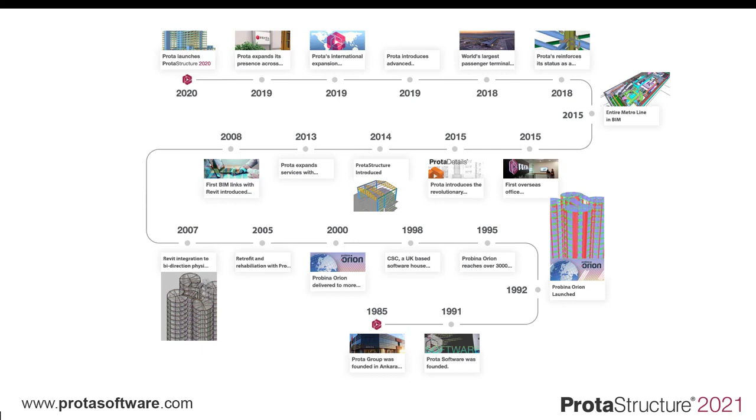Every now and again, a revolutionary software comes along that changes the engineering design industry, completely transforming the way structural engineers work. Now at Prota, we have been fortunate over the years to have been involved in some of these technologies which have shaped the way structural engineering is delivered.

In 1992, we introduced Orion, the first system in the world for integrated concrete building design and detailing. In 2005, this was the first software solution to provide detailed assessment procedures for building rehabilitation after major earthquakes, allowing the review of tens of thousands of buildings around the world to quickly provide safety and post-earthquake relief.

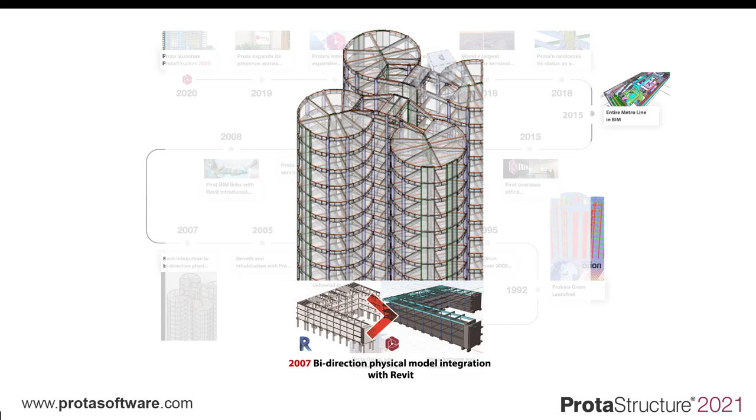In 2007, we were one of the first solutions to provide physical, bidirectional structural BIM integration with Revit, allowing engineers to communicate their projects and coordinate them with Revit. In 2014, we introduced one of the first dedicated physical multi-material modeling and design systems for building structures, ProtaStructure.

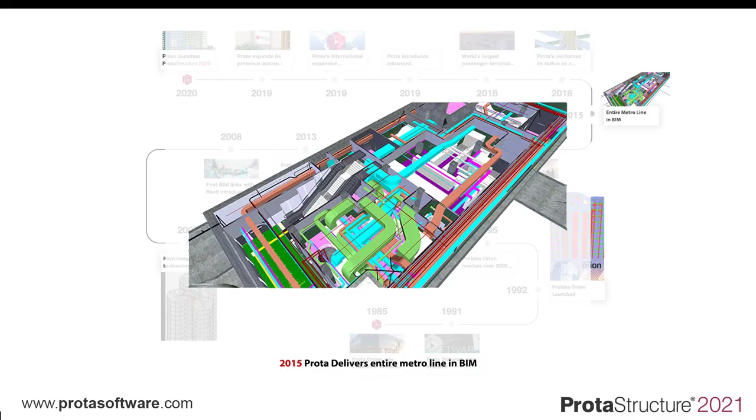Our engineering teams in 2015 were one of the first consultants globally to deliver an entire metro line fully in BIM, from alignments to structure and architecture to operational systems and construction project management, all using integrated BIM technology. And we followed this up in 2018 when we delivered the world's largest airport terminal building in record time using BIM design technologies.

Innovation is part of our DNA at Prota, and we have a passion for creating elegant and practical structural engineering design solutions that make your world a better place.

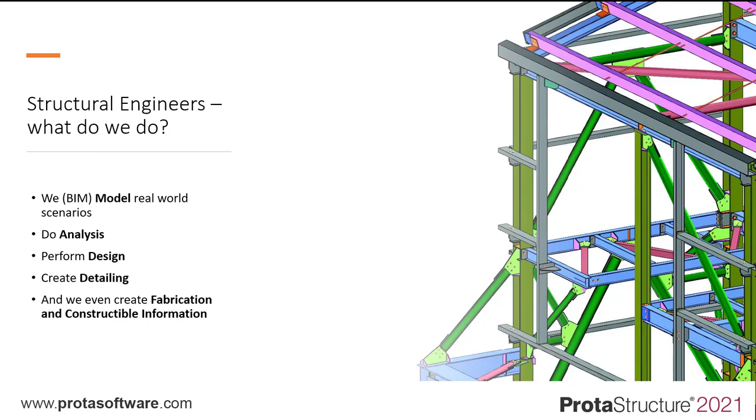As structural engineers, we wear multiple hats. We model the world around us. We do analysis. We perform design. We create detailing. And we even create fabrication and constructible information. We also coordinate and share project information through BIM.

Modeling, analysis, design, detailing, fabrication and BIM. It's a lot to cover.

Traditionally, engineers have used many programs to cover this. For analysis, you have systems like STAAD, SAP, Midas, S-Frame, Robot, ETABS, SpaceGass, and so on. There's literally thousands of them out there. Many of these do some design, but mainly member element design. Some even have component design, maybe using Prokon, Tedds, LIMCon and so on.

But what if you want to do a complete detailed design? Design a core wall, a continuous concrete beam, a steel connection, some foundations, with all the detailed checks for anchorage, lap lengths, ductility requirements and so on. All the design and associated detailing requirements, all in one.

Very few do any detailing. Normally it's manually driven with AutoCAD, BricsCAD, G-StarCAD. I'm sure you'd agree there's so many generic CAD platforms out there. But do they provide tools focused on structural detailing? Do they know what a rebar is or a beam is, other than just lines?

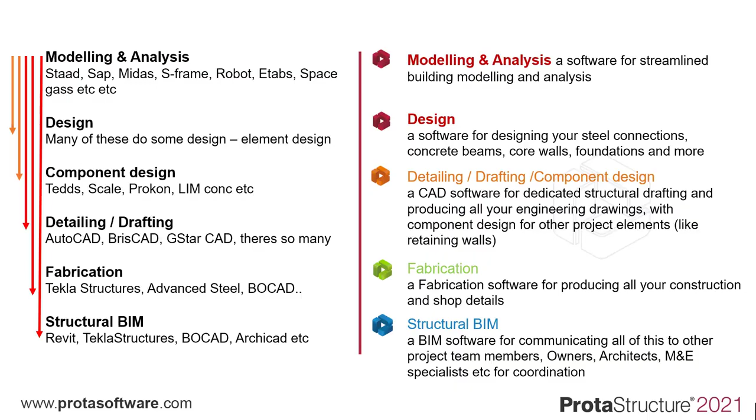A fabrication software for producing all your construction and shop details. And a BIM software for communicating all of this to other project team members, owners, architects, M&E specialists, and so on for coordination. A software for modeling and analysis, for design, for detailing, for fabrication, and for BIM. Modeling, analysis, design, detailing, fabrication, and BIM.

What if all this software was one software? We are very, very proud to introduce the future with ProtaStructure 2021.

Today I'll be taking you on a journey through ProtaStructure 2021, and we're going to share with you many of the fantastic enhancements which make ProtaStructure the leading structural BIM design platform for buildings. I'm very excited. This has been a combination of effort from a fantastic team of professional engineers and software developers around the world to realise this vision.

And to share this with you today, I'll be joined by a number of our key innovators that have made this all possible. So during the course of today's presentation, we're going to hear from Alto Gula, ProtaStructure's Development Manager, Mustafa Tumatan, ProtaStructure's Product Manager, and we'll also hear from Joseph Kubin, who's the CEO of the Prota Group and founded Prota Software many, many years ago.

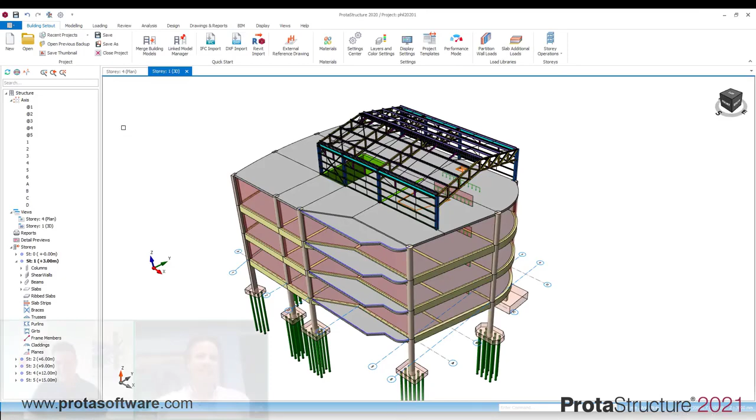Alto, I'd like to start with you. The new interface is so cool, right?

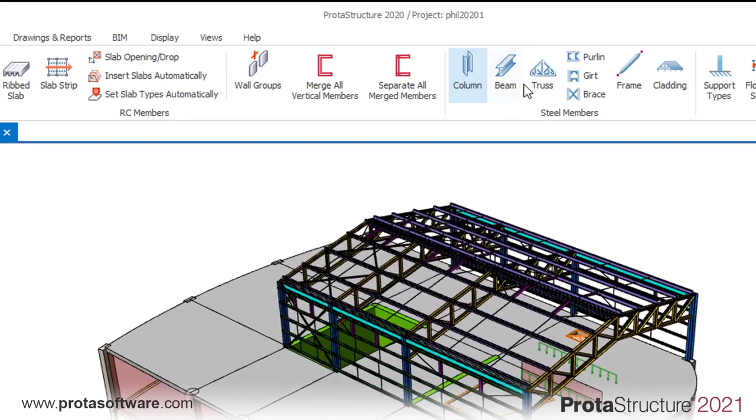Yes, it's so exciting. With ProtaStructure 2021, we looked at how engineers work and revisioned the entire interface. Here you can see the new ribbon. We've designed new icons to clearly show different functions like working with beams, columns, trusses, and the like. We've also logically laid out how, as an engineer, you'd work through a project, from creating a model to applying your loading, to performing analysis, and then running your design, right through to documentation and BIM collaboration. Everything is where it should be.

Yes, it really looks impressive. I love the new interface. It's very clear and easy to navigate. There's more to this though, isn't there?

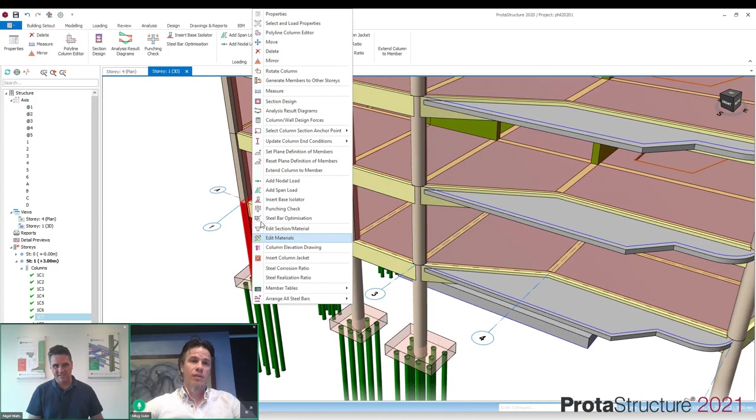We've kept the essence of ProtaStructure, so it's a very seamless transition for existing users. This is very important to us. The things that make ProtaStructure so great to use are still there. Users will see a lot of familiarity within the interface. Things like right-click functionality and many of the user menus have been kept, because over the years we've found that these are a very efficient and practical way to work. Users will also find that they can start using the new release right out of the box. They don't need to learn a new way of working.

Yes, I agree. When I started using it, I found it so easy to pick up and to work with. But there's just so much more, isn't there? Yes, there is. There are so many innovations to share with everyone. Yes, I can see you smiling there. Yeah, let's show them.

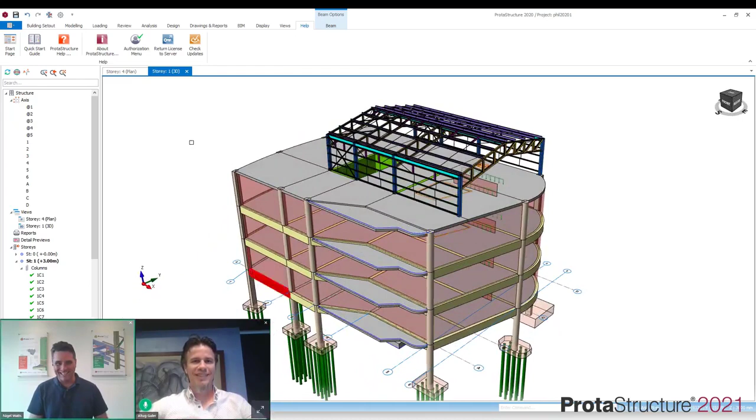To start with, we have a brand new way to welcome users, our new start page. Here you can see at a glance important information to allow you to get the most out of your Prota experience. On the left, you can see a visual list of recent projects you've been working on, and you can select and load these directly from here.

We've been wanting to provide a more interactive and engaging experience for our users. Centrally, you can see there's now a direct news feed, so you can hear about the latest developments and news from Prota. Upcoming webinars, new technology updates, and the like will be listed here live. We've also listed the latest videos and webinars we produced, so you can directly watch them from here and not miss out on learning about the many features and new things we're introducing into ProtaStructure. So if you want to watch the latest webinars on topics like foundation design, performance-based engineering, and flat slabs, all these can be found here.

Off to the top right, you now have direct access to key resources. For those new to Prota, here you find quick start guides for getting up and running. New users can check out many of the new features here. You also have direct access to our help center, the knowledge base, where you can explore and find out about specific topics of interest to you.

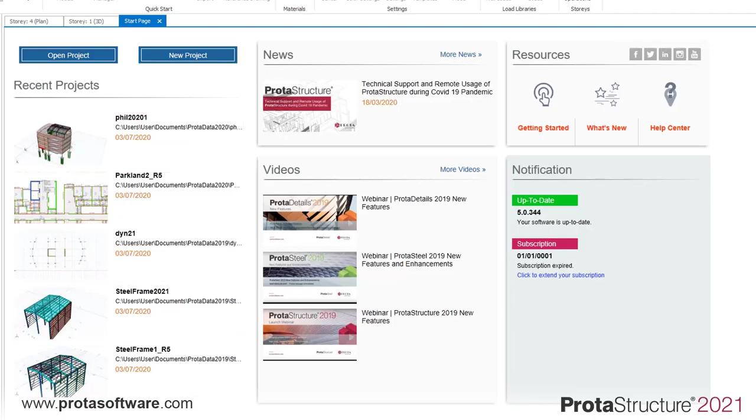We also now notify you of new updates to your system, which are deployed live, and you can quickly update your system with the latest build and enhancements within a few seconds. So the whole start page has been created to provide a more interactive experience so users can explore and engage with Prota. Yes, I think it's fantastic. I think users will really get a lot of valuable information and knowledge from the new start hub.

It looks great. But I know you're itching to share how users can now start using ProtaStructure 2021. Yes, I am, and this is really, really fantastic. At Prota, we've continually been looking at ways to simplify and streamline our users' modeling experience. To do this, we've developed a totally new technology which brings together information from a range of sources to help you get started. So I'm very pleased to unveil our new Prota Hub.

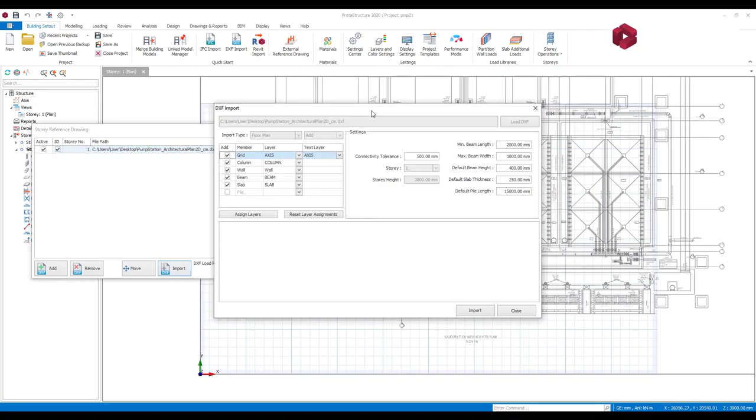Prota Hub deploys leading BIM technology and redefines how you can take advantage of both 2D and 3D information to get started. Now, I'm sure many users out there have used CAD to create key plans of their proposed structural arrangements, or perhaps they have drawings from older projects where they're modifying existing buildings. Normally this information would be viewed maybe on the desk next to you as you create your model.

Now, however, with Prota Hub, this information can come to life. Here you can see I'm importing a 2D DXF drawing file of a key plan. Prota Hub allows us to identify information in your plan, like beams, walls, slabs, and columns. It then automatically extrudes this information into 3D.

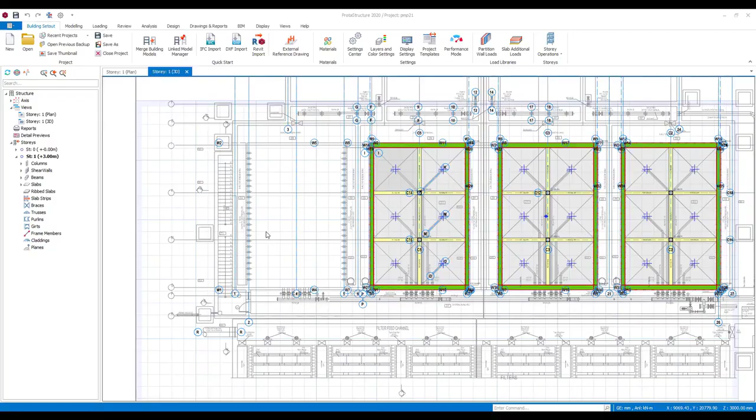You can immediately create your 3D model from 2D drawing information that you have. It doesn't stop there, because we can also take a range of 3D information and bring this in as well.

Here I am directly importing 3D DXF information, which may have originated from a general analysis program like SAP or STAAD. We will automatically bring this in and create a physical model. We can then assign member properties and loading to complete the model for design.

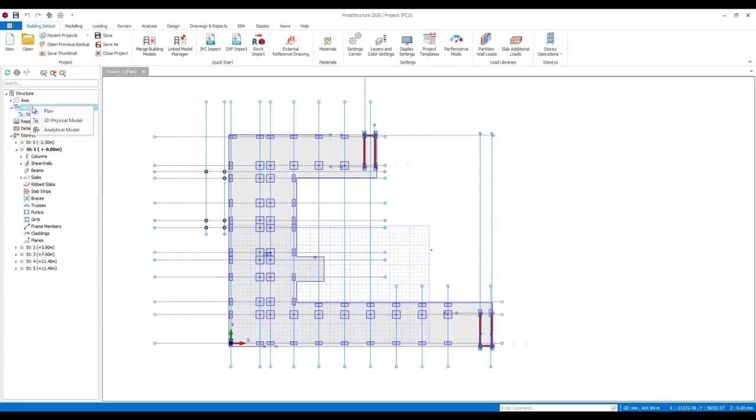We can also bring directly into ProtaStructure existing BIM models. Here I'm importing an IFC file, and ProtaStructure rapidly recreates all the physical elements: beams, walls, columns, slabs, even piles inside of ProtaStructure. Once we have this into the model, we can overlay information from architectural plans to help coordinate and further refine models. I can see things like partitions, plinths, service openings, and drops, and create this in our model also.

Wow, this is really fantastic. I can see this literally saving users hours and hours of modeling time.

Yes, you can even use this to import irregular truss arrangements directly from CAD. Once we bring them in, we can also work with the elements and assign different member properties for design. You can, of course, refine and add to any of these imported models as you go.

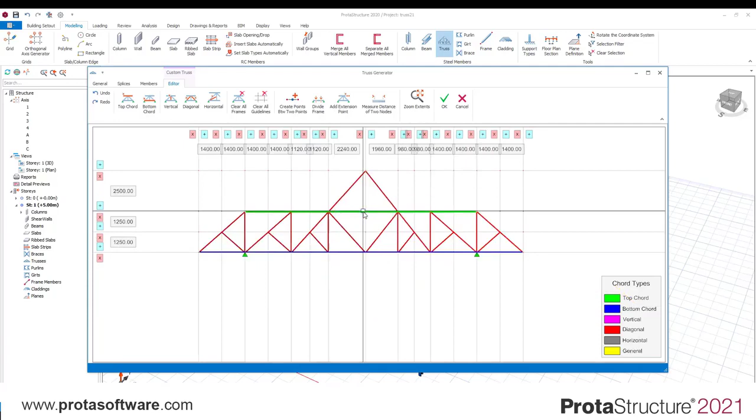I can see this being a major advantage with starting any project, when you even have some basic information at hand. How about general modeling in ProtaStructure 2021?

Of course, we have kept all the things that people love about ProtaStructure. You can use dynamic grid lines to help create setouts. You box around to create members quickly. You can also use intuitive sketch lines to create unusual slabs and foundation arrangements. There's also tools for modeling in 3D with planes and intelligent snap points. And we also have smart libraries to help create additional loading like brick walls and slab finishes.

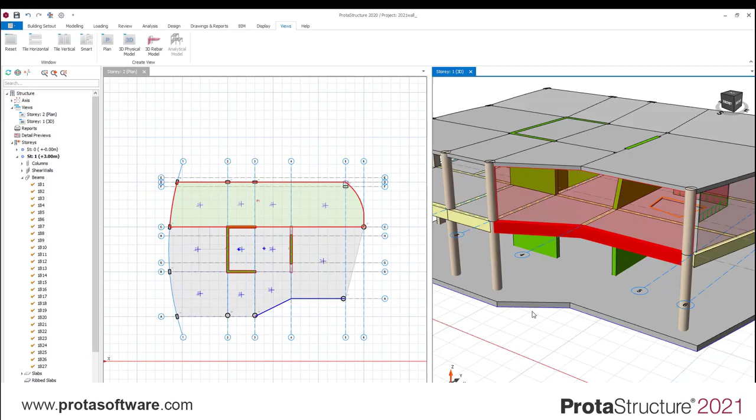Of course, we can dynamically adjust elements to suit architectural setup, which is great to refine your models.

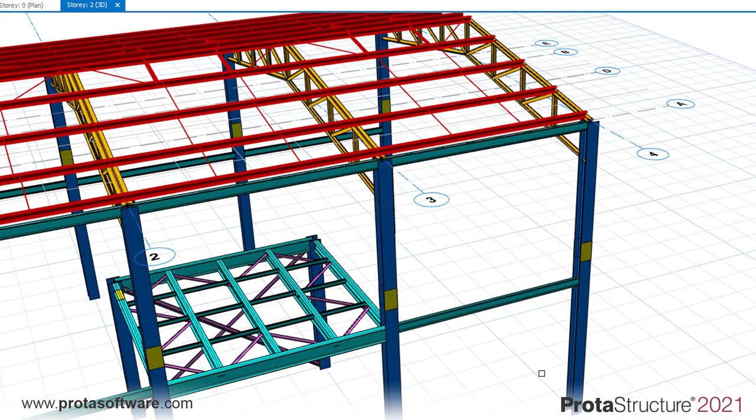But with the 2021 version, we have also introduced new and enhanced contextual modeling. What do I mean by that? Well, in ProtaStructure, we create models with fit-for-purpose elements. So here you can see that I can snap between elements like trusses in this roof and automatically preview a set-out arrangement for the purlins. I may want to make adjustments here to the sections, loads, layout, but I can then instantly create this into my model. The days of keying in nodes or creating members one by one are gone.

Here I'm inserting multiple braces into a bay, and I can play with all the positioning in 3D to create exactly what I like. Top and bottom chords, bays between columns, all can be easily handled. The same can be done for other common elements like girts in your model.

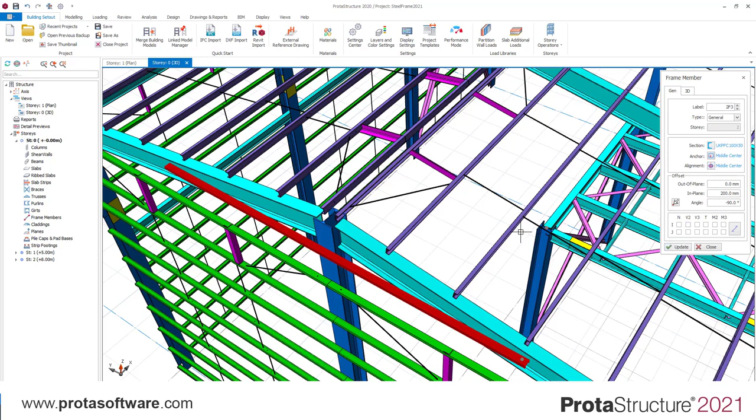With ProtaStructure 2021, we have also provided you with the freedom to express yourself. We now support free member modeling, where you can enhance and create any element in the model suite. You can position elements how you wish and manipulate member properties as well as full analytical member releases to suit your requirements. All this is then fed to the analysis and design engine for checking.

And to make loading a complete breeze, check out our new panel element for applying pressure loads. Here you can see I've applied some dead load to this roof.

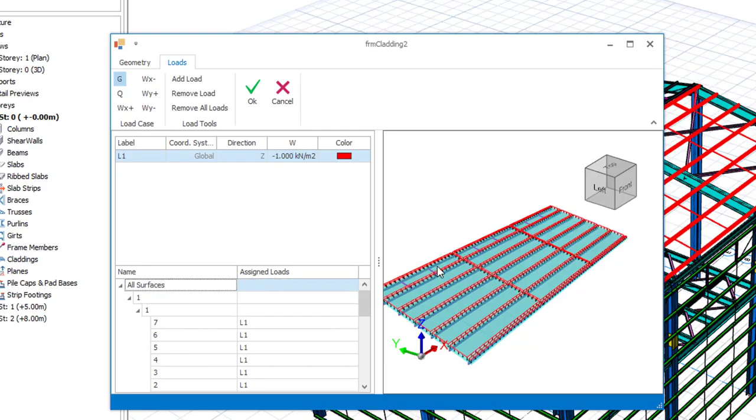It's fast and easy. That's great. I can remember the hours taken when I started designing, keying in nodes and elements. It was very painful. Contextual modeling is very flexible and saves loads of time.

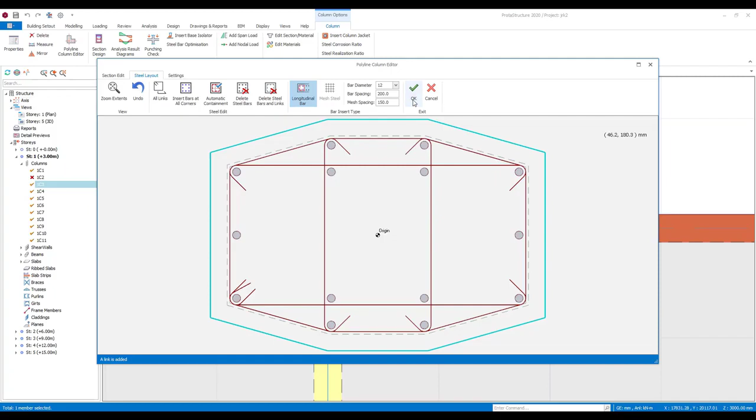Yes, we haven't stopped with steelwork though. With concrete elements, you have the freedom to create any column or wall arrangement you like. Here in our columns, we can of course design and detail regular arrangements automatically. But what if you have something irregular? With ProtaStructure, we can make use of smart polylines to define whatever shape we like. We can then use tools like auto-containment to create steel bar arrangements. These can be further refined if you wish for providing additional ties, bundled steel, whatever arrangements you like.

We also see many users working with a range of different wall arrangements. And with ProtaStructure 2021, we have focused on providing some really amazing tools to help you manage the modeling and design. Any arrangement of walls in ProtaStructure can be modeled, but we then created the ability to select an arrangement and merge wall panels together for design. ProtaStructure then automatically provides containment detailing, including intelligent end zones for design around the merged walls. These can also be manually adjusted to suit your requirements. We made it very flexible.

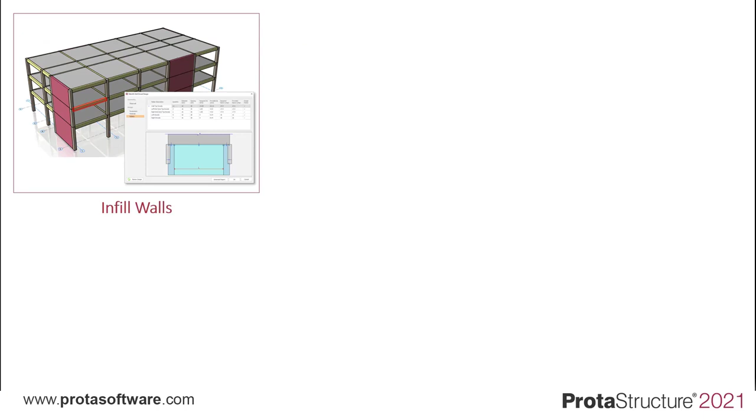We also have introduced new modeling elements in ProtaStructure. You can now create infill wall panels, which are really useful for enhancing shear capacity to existing structures. This is in addition to items like base isolators, splices, and column jackets, which can be used to retrofit and strengthen existing buildings.

We also have coupling beams and even basement walls with soil pressure loading. All of these can be selected from the properties menu as you create your model. You'll also notice when you're modeling that contextual ribbons will appear depending on what you are creating.

Here you can see all of the commands that can be applied to the element you are working with. So for this beam, I could review analysis and design results, edit member loads, use our brick wall libraries to quickly define brick wall loading, check deflections, and even set rebar corrosion factors for building assessment. All this can be done in each tailored menu.

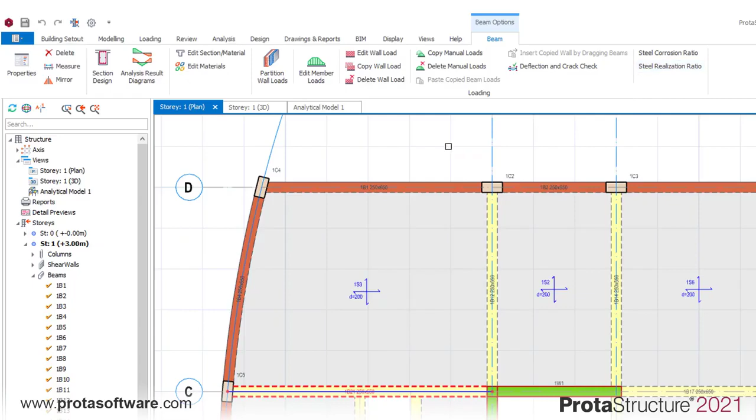To return to the modeling environment, you can just hit the magic escape key. It's just that simple. Wow, I think many of our users are going to be very impressed with all of this.

I believe so. Users will also see that model creation and editing is extremely fast and responsive. We are taking full advantage of our 64-bit architecture and advanced modeling platform to deliver a very dynamic, fluid, and intuitive user experience.

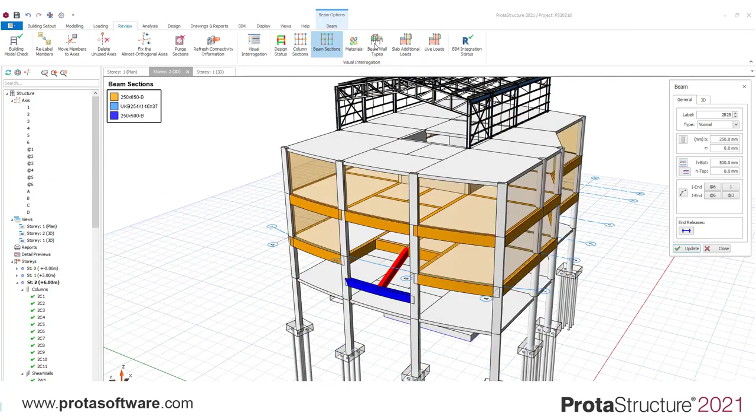Once modeling is completed, users can also review and check projects before they move into design. You can simply click on the review menu at any stage where you can check things like superimposed dead and live loading, brick wall loading, and material properties. It's great to be able to review all of this before you get into design.

Thanks, Altug. I think there's some extremely impressive ways to start models using our Prota Hub technology with the 2D, 3D, and BIM information imports.

It's amazing to see how you can develop and work with the model using contextual modeling commands and the intuitive menus. It's very fast and fluid. I really like this. I also love the new wall containment, and the new ribbon looks fantastic.

What I also really like about the environment is how when you hover over an element, you can see these new tooltips which offer handy advice on how to use each feature. What's more, I can also watch short videos demonstrating how to use these.

It's great. I'm sure our users and our support team are going to love you for this. Yes, that's called in-product learning, and I think that's really going to help users learn and take advantage of new features very quickly. It's a great way to interact with the system.

Thanks for that insight, Altug. It looks brilliant. Well, it's been great bringing this to life.

Hi, Mustafa. Well, the story doesn't end here, does it? We have some fantastic new analysis features to showcase, don't we? Hi, Nigel. Yes, we certainly do. While Altug was speaking, I've been trying to contain myself. It's great seeing all this new technology coming to life.

And you're right, this is just part of the complete system that's ProtaStructure 2021. There have been so many different elements which have come together with the 2021 release to redefine what people should expect from a modern, comprehensive building design and detailing system. Now, there's a lot I'd like to share with everyone today, but where I'd like to start is with our custom templates.

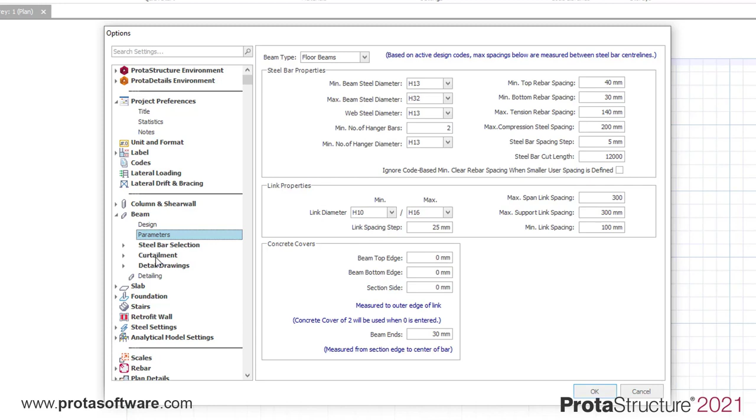So if I'm a business with operations across Asia, for example, and I'm doing projects in Bangkok and the Philippines and maybe Singapore, I can easily adopt the local practice being used for any of these countries. I don't need a complete understanding of, say, the detailing nuances in Thailand as opposed to Singapore. Simply select your preferred template and get straight into modeling.

With the 2021 release, we have also centralized all the settings in one place, one locality where you'll find all the standard settings used across the whole ProtaStructure suite.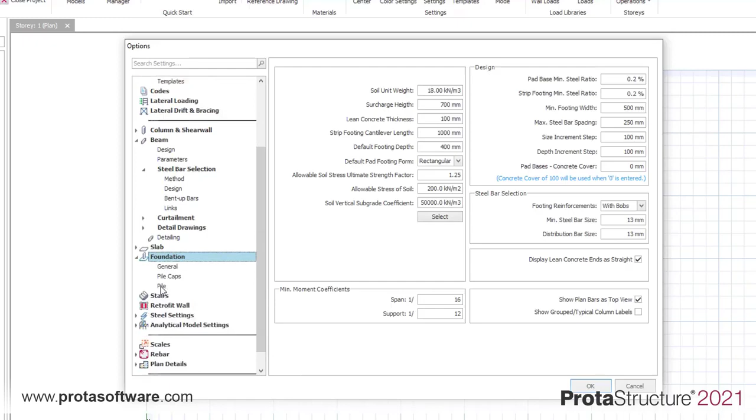Yes, I can see that helping many businesses save time, both with setting up their projects and being able to adapt where they are delivering projects across different countries, each with their unique requirements. Yes, a lot of thought has gone into providing this unique flexibility.

Moving on, after automatically creating your load combinations and setting up your analysis parameters, the first thing you'll notice is that ProtaStructure 2021 runs the analysis significantly faster than the previous versions. In fact, both the analysis and design processes now take full advantage of multi-threading with our enhanced 64-bit architecture.

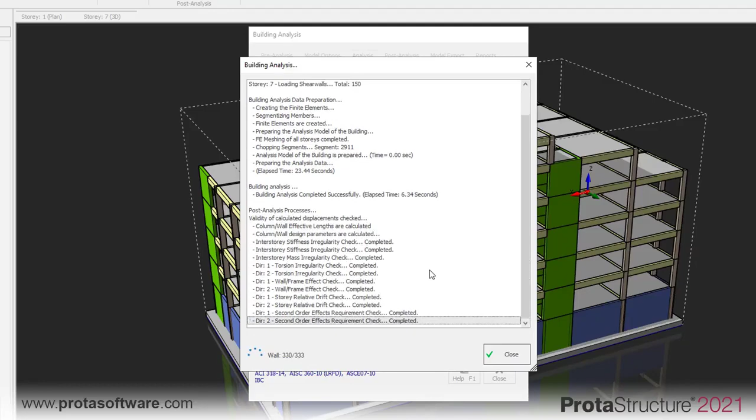You can throw virtually anything at it, and it will rapidly complete analysis and design, whether it's a large industrial complex or a 70-story office building. You'll find the solver quick and responsive.

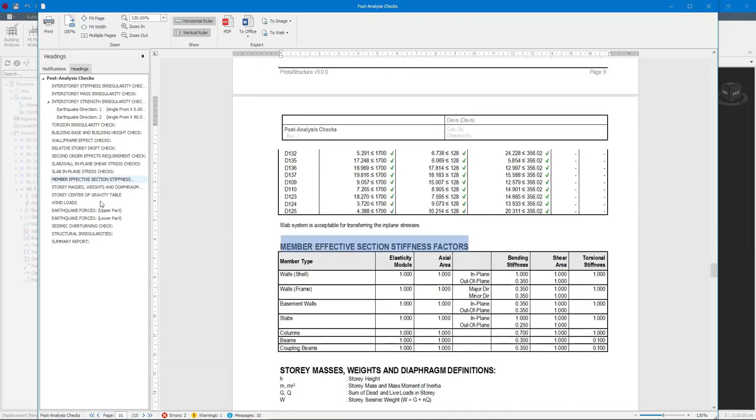You'll also notice that as we run the analysis, we are also performing on-the-fly checks for things like inter-story drift, vertical and horizontal irregularity checks, and load chasedowns. ProtaStructure has some very thorough checks to ensure you are meeting code requirements, and these extend especially to meet rigorous seismic analysis procedures to comply with code requirements.

Once you're done, we can open up our brand new analysis post-processor. In here, you'll find one of the fastest, most responsive post-processors ever developed for viewing your analysis results. Here, I can select to look at, say, axial load, and instantly the model will update. You can easily flick through different load cases or combinations to suit. At any point, you can zoom in and you'll see that the views are adaptive.

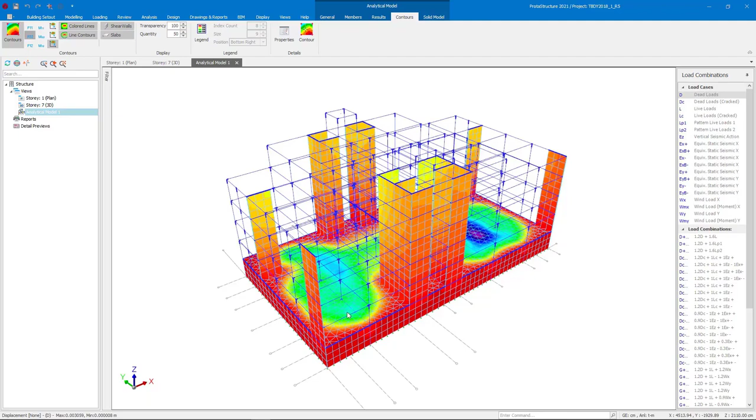You will also see that there is adaptive scaling, and we can just show the key results against the diagrams, minimum and maximum moment for a span, for example. Perhaps we also want to look at the stresses, and we can turn on the contour plots. You can differentiate between, say, the floor slab and wall by toggling them on or off. And you can just adjust the stress plots to suit.

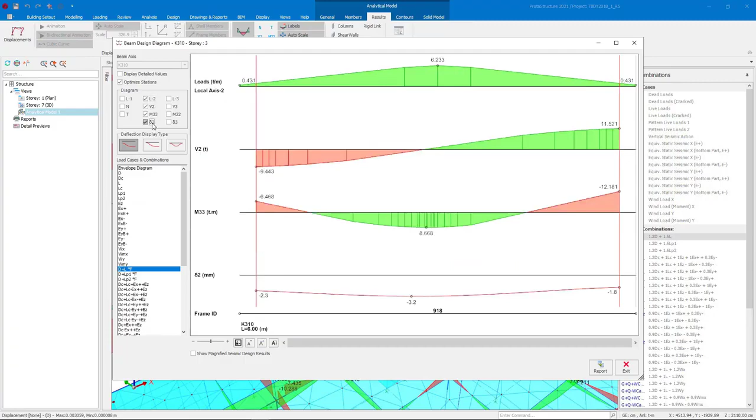It's very fast and flexible. You can also dig down into member results and interrogate all the results. Here I can look at envelopes, deflections, or turn on or off selected results like torsion or relative member deformations to suit. Just for a bit of visual fun, we have also created a new solid model where you can

see the physical elements dressed in color-coded analytical results. It's a nice way to review the magnitudes of the actions acting against the real thing. Yeah, that looks so cool.

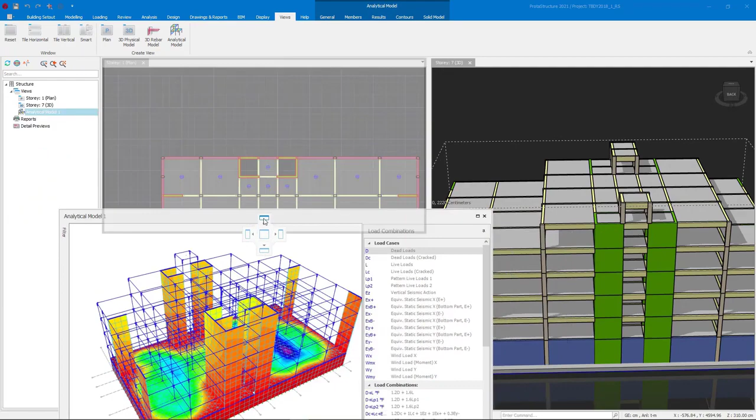Yes, the analysis views can be docked in any part of the screen. We also understand that many users have large projects, so these windows extend to additional screens if you have them. You can instantly click and activate the screen that you want to work with. It's completely dynamic.

We also understand that as design engineers, you have to consider a wide range of analytical scenarios. These are also intrinsically linked to the type of design you're doing. For example, if you are performing seismic design, you want to be able to consider response spectrum analysis. But not only this, you need to be able to consider this in the context of the codes you're using. Attached to the analysis are a wide range of code requirements that must be satisfied.

We do this in ProtaStructure by building intelligence into the analysis procedures, which then allow us to automatically perform these checks and adapt the analysis results to suit. If I just take a moment to expand on the RSA example, while we are running this, we also perform an equivalent static analysis concurrently at the same time. We then calculate the static base shear, and depending on the code requirements, we automatically scale the response spectrum results to match this base shear.

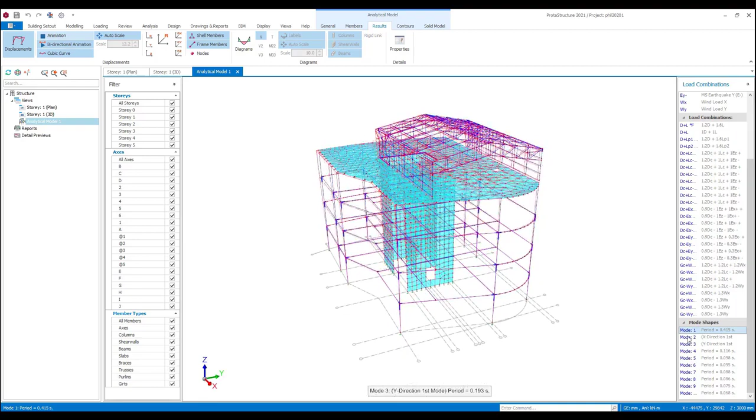Almost all other solutions in the market require you to do this manually, and this can take considerable time and effort. This is just one way in which we are saving engineers hundreds of hours with analysis and design. Yes, having designed a number of buildings in my time, I can fully appreciate those features.

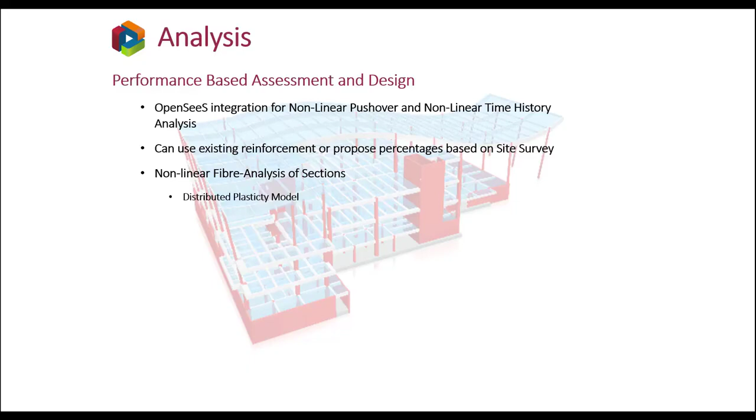Yes. This year, we have also introduced comprehensive nonlinear analysis capabilities. And again, these have been adapted to provide you with immediate real-world usage. With ProtaStructure 2021, we now provide both nonlinear pushover and nonlinear time history analysis. But not only have we introduced analytical capabilities, we have also provided comprehensive performance-based design and building assessment capabilities.

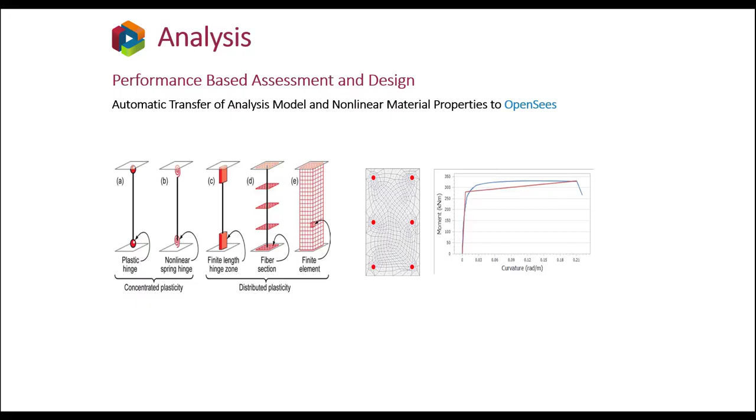For those of you that have ever had to set up a nonlinear model for performance-based design, you'll fully appreciate that preparing this data, especially the creation of the fiber model, can take weeks. With ProtaStructure, we instantly create this for you. That's great, right? I can just imagine how long that takes to do by hand, yeah?

Now, all these time savings and analysis and design procedures are all adding up. Yes, they do. This also extends to wind, where, as you can imagine, wind loads need to be assessed and applied. In ProtaStructure, this process is automated and customized to suit the codes you use. With the 2021 version, we have enhanced this by considering crosswind and orthogonal pressure to fully comply with the code requirements like the latest ASCE, for example.

Just key your wind speed in, make adjustments for local topography and building types, and it's done. Finally, we are also introducing advanced stage construction analysis with time dependency properties for creep and shrinkage. This is being performed to CEB-FIB 90 and Eurocode 2. Look out for these enhancements in Service Pack 1.

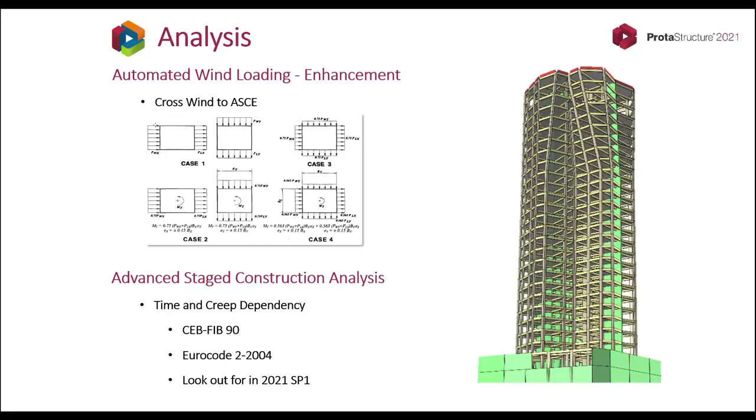Well, the enhanced speed, the new analysis processor, and the advanced analysis and loading capabilities really look brilliant. Thanks, Mustafa. That's great. I think all we've provided there makes loading and analysis very fast and efficient, and all streamlined to what engineers want to do with building analysis. Yes, I think this really makes all these time-consuming processes really efficient, so you guys can get on with providing economical design.

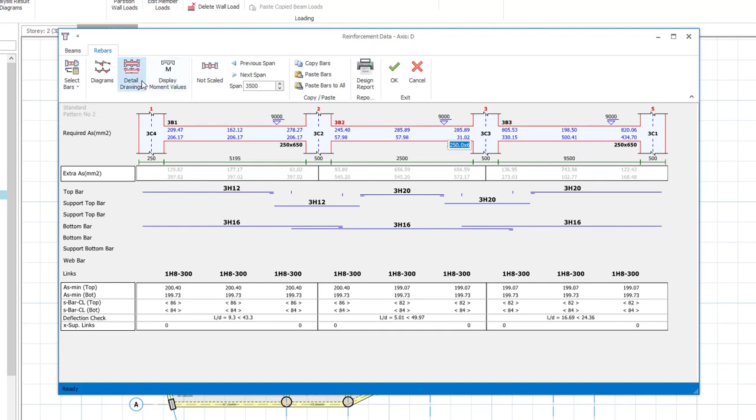With the beam design, you can now visualize the frame element in 3D, where you can also make adjustments to properties on the fly. You can also dynamically tweak bar arrangements, copy and paste arrangements, and even edit section sizes in elevation. You can also make use of dynamic diagrams, where you can interrogate the results just like an analysis post-processor, all seamlessly integrated.

As Alto mentioned earlier, we have also enhanced the column and wall confinement approaches. But we have gone one step further with this technology in the 2021 version with the introduction of not just merged walls with fully integrated analysis and sectional design, but also enhancing the way in which we automate the design of confinement zones at the wall ends and around the corners.

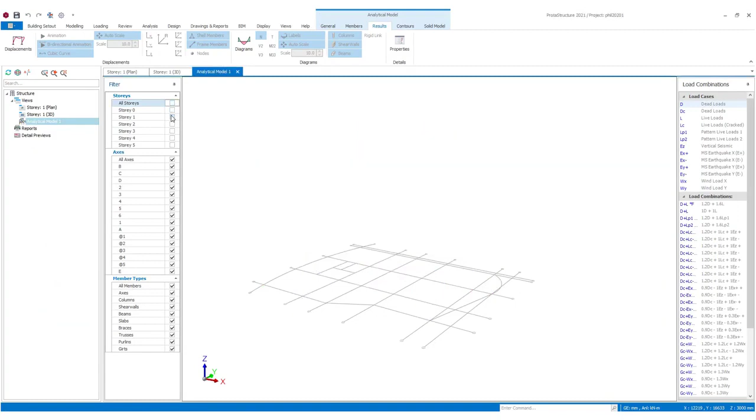We will optimize the bar selection for these arrangements to provide you with the most design-efficient solution. You can imagine the thousands of irregular wall arrangements out there, and the time it takes to properly design and detail these in accordance with the code and to provide real economy to your projects. Our new wall confinement technology addresses this with just a click.

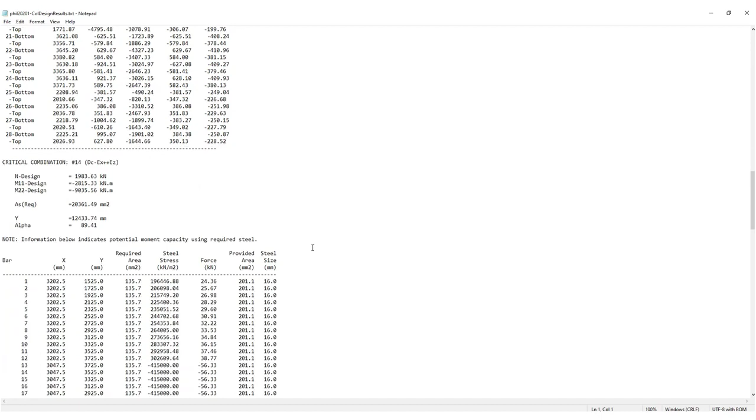That's marvellous, Joseph. I know in Asia we see thousands of buildings where walls are extensively used, and this will be a great way to add value to design while providing a complete solution through to the detailing. Yes, users around the world will benefit from this. Just another way we are refining our design to add value.

You may have seen earlier that now we support free member modeling, where you can create virtually any setout by importing from CAD, BIM, or directly modeling in the software. Well, these elements are also passed into the steel design.

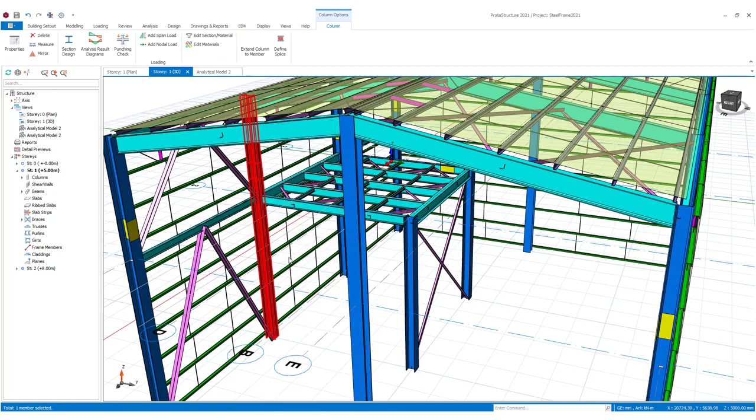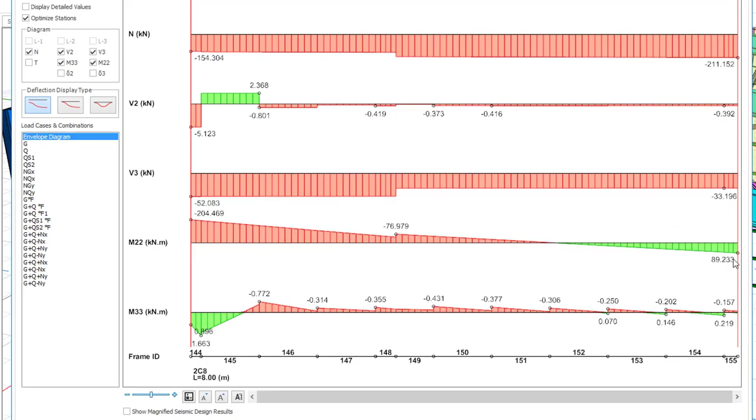We also enhanced the intelligence around steel effective length calculations for situations like where a column has additional restraint from an intermediate landing beam, and we also track the bending moments to provide the highest accuracy when it comes to design. So the enhancements we have made here fine-tune this to provide you with an optimum design.

We have also implemented custom deflection checks, where you can check to the code or provide your own tolerances. This is great if you are working on sensitive projects, for example, where deflections are critical.

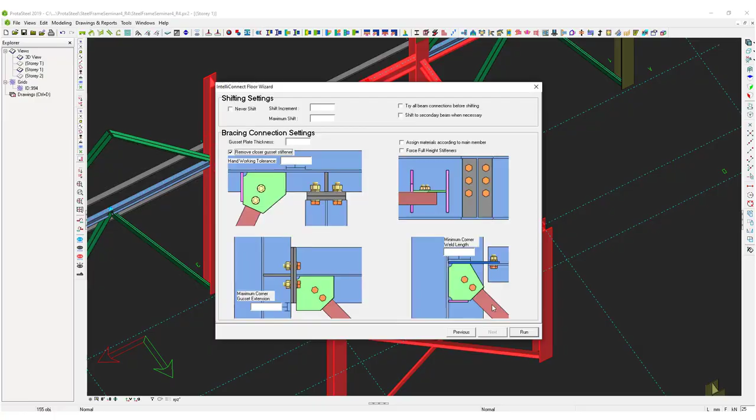Now, once your steel members are designed, we have also significantly enhanced the steel connection design in ProtaSteel. You can really take advantage of AI by using IntelliConnect. AI? Yes, IntelliConnect assesses each joint individually and intelligently designs the related connections for both structural safety and, more importantly, constructability. It's artificial intelligence in action.

So here you can see I've designed an entire floor, beam to column to brace connections automatically, and it assesses the joint, and intelligently makes relevant adjustments as it goes. That's amazing. Yes, it's saving users literally days of time.

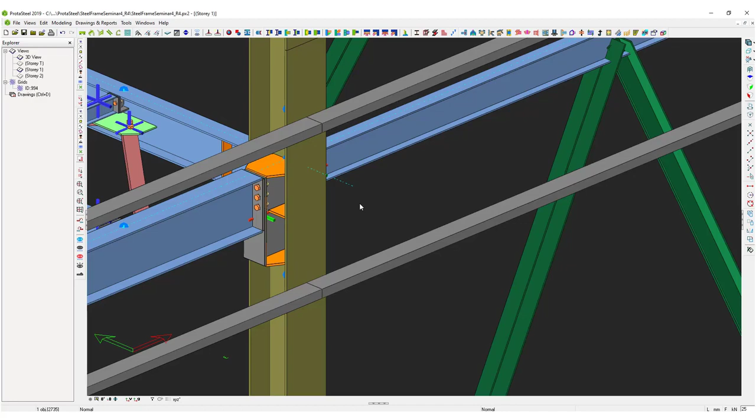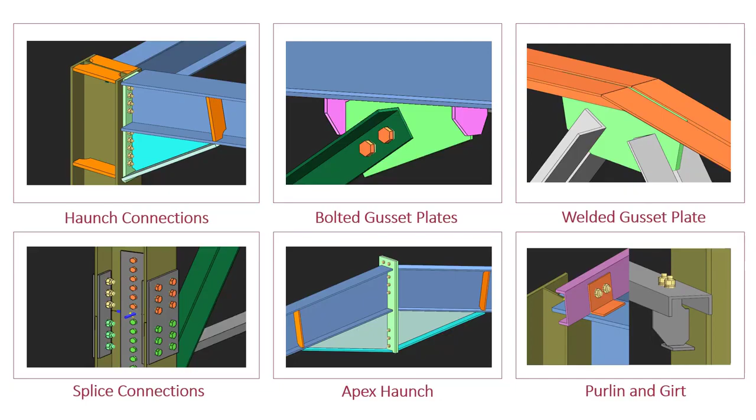With the ProtaStructure 2021 version, we also have extended the library of steel design macros. They include haunch connections, both bolted and welded gusset plate connections, splice connections, apex haunch connections, purlin and girt connections. This now means almost all the library of steel connection macros are now designed with full code-based calculation documentation. So, if you really want to check relevant clauses against the code, you will find all step-by-step detail in the calculations.

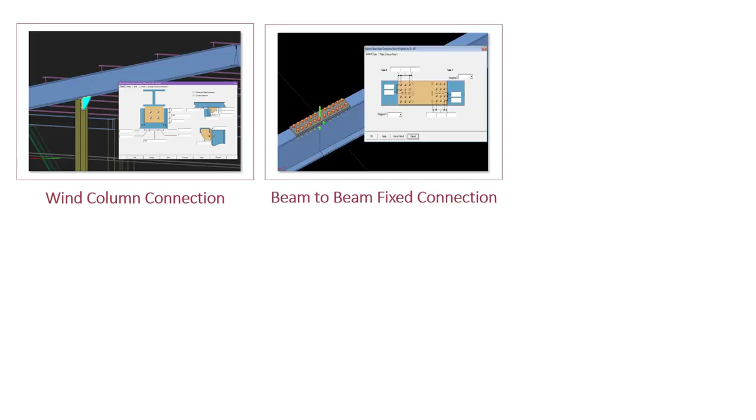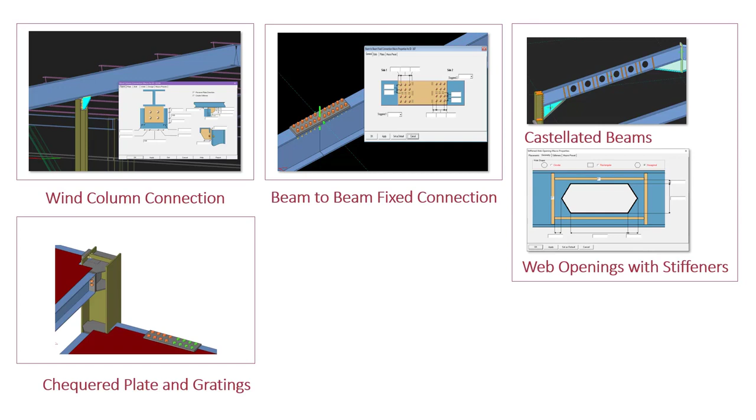We have also included a number of very useful macros, including wind column connections, beam-to-beam fixed connections, castellated beams and beam web openings with stiffeners, chequered plate gratings, automatic stair treads and handrails. Many of the new connections, including those to concrete, have been added as scenarios to IntelliConnect to automate their design.

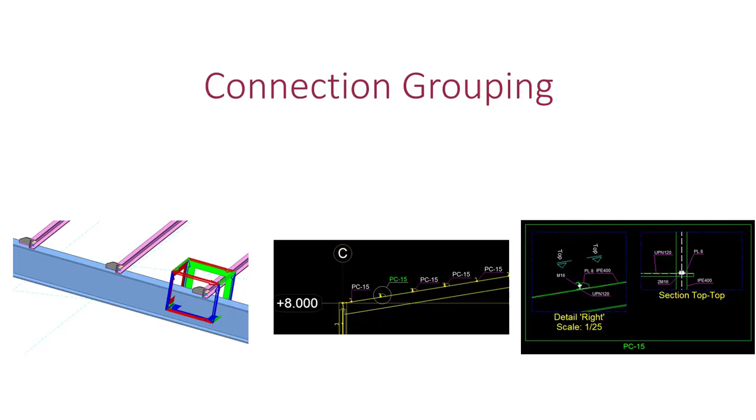Now, just to finish this off, we have also introduced connection grouping, where we will automatically detect similar connections and link and reference these to the relevant details. That's fantastic. Having designed a lot of steelwork structures in my time, I can fully appreciate those capabilities. And this adds to the ability to create your own custom connections, making steel connections a very complete package. There's virtually nothing you can't create.

Yes, I'd agree. Moving onwards and downwards to the foundations, we now fully automate the design of pad bases, which can now be done together with the pile caps. We will optimize the size for you to come up with the most efficient arrangements. Like the pile caps, these can also be rationalized and grouped together.

So we're going from the roof right down to the foundations, right? All in one model.

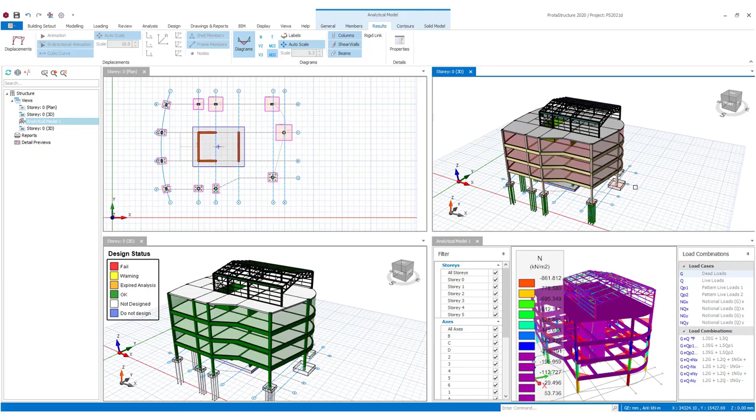Yes, that's the key fundamental here. All modeling, analysis and design capabilities, all in one environment, all part of the one seamless whole.

We have also extended the design code coverage in this release. With ProtaStructure 2021, we not only cover the US, BS and Eurocode standards, but also localizations and language-based versions to suit specific markets like Romania, Poland, Germany, Thailand, Indonesia and the Philippines. All this is to provide our users around the world a focused approach to suit their own local requirements. And please watch this space because we have more codes on the way.

Yes, I think there are many users that appreciate the localization of things like detailing and design preferences to suit their local practice. This has been a priority of our development, hasn't it? Providing flexibility to meet both global and local requirements to provide fit-for-purpose design solutions.

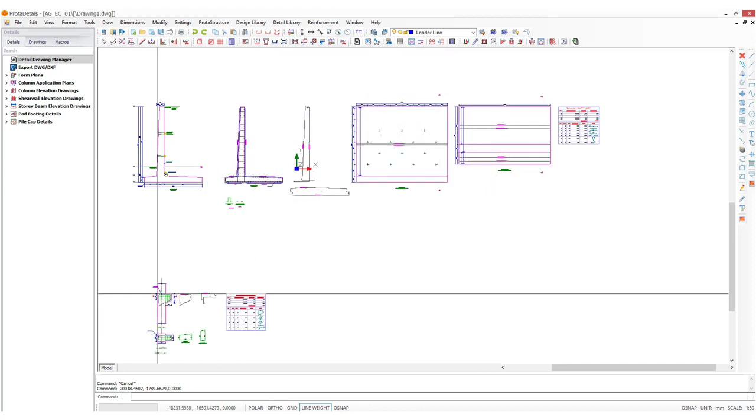Yes, just to finish off design, we have continued to enhance our unique design and detail library of component design macros. This is where we provide solutions for element design around the core of ProtaStructure. So say you wish to design a retaining wall or a core wall or perhaps a piling system, you can use this library to not just design these components but also detail them. We also have core components of building design interface in here. So if I want to just design a pile cap or a pad base, I can use this independently. I don't have to go and create the model first. I can just key the loads in and use the same common interface I am familiar with to create the design and documentation.

Yes, I love this growing library of calculations. They're all very useful in complementing a design, scheming up or checking. They're great. Well, thanks for this, Joseph. There's some brilliant new design features with ProtaStructure 2021 there for our users to enjoy. Thanks, Nigel. It's our absolute pleasure to share this knowledge with everyone. We are excited to be able to bring this to life and for users to enjoy this technology. Yes, thanks again, Joseph. It's great seeing our vision being realized.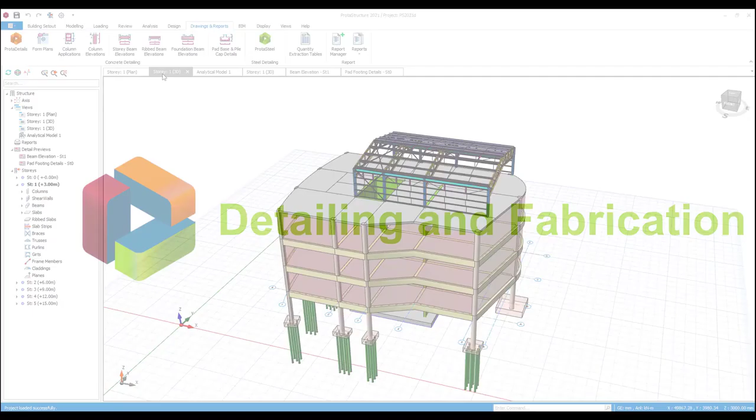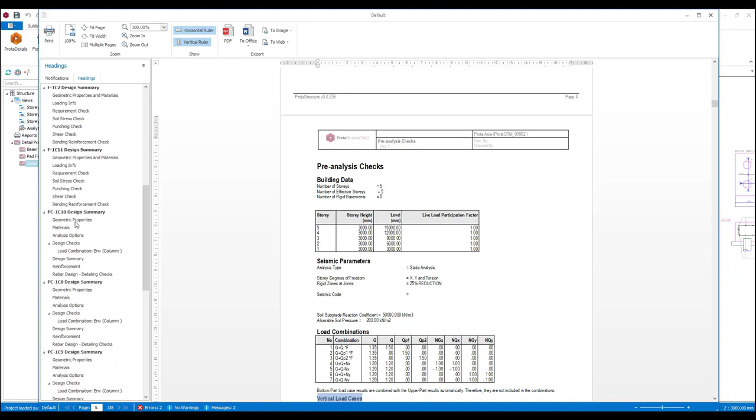ProtaStructure 2021 seamlessly brings your engineering documentation to life. So while I can easily switch between reviewing modeling, analysis, and design views, with this new technology, we're also providing you with the ability to review details on the fly before publishing them into your drawings. So whether you want to see walls, beams, or foundation details, all of these can be previewed here in the Drawings and Reports tab. Here you can also compile your design reports for the whole project, from analysis results to detailed member design, as well as all the elemental design like pile and retaining walls together with your steel connections, all into one document, all organised and customised to your preferences.

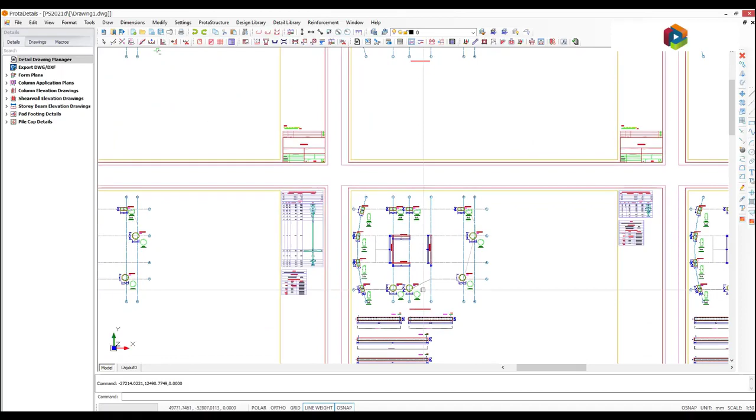Now once your design is complete, this is where the power of having one integrated seamless system transforms documentation. Here you can see that I've automatically created all the RC drawings, all laid out into my sheets with a single click. Everything is created, from the foundations to set out plans, to column and wall elevations, the group column schedules, to all the beam elevations. Beam schedules can also be provided to complement the design. And last but not least, we have our foundation details, all automatically laid out into your drawing sheets.

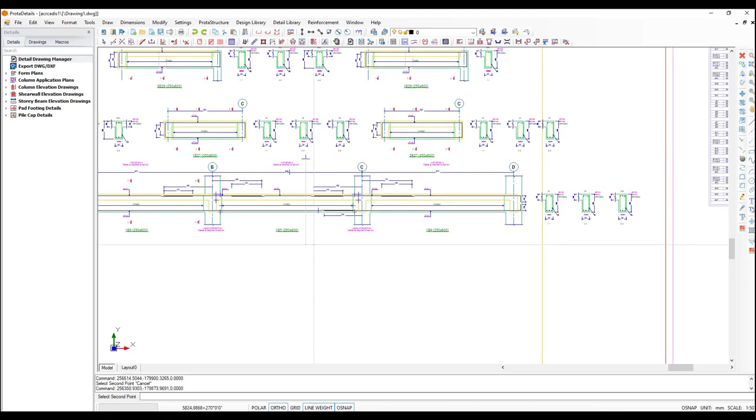The ProtaDetails environment is a fully flexible CAD system. It uses standard CAD commands like you'd find in other drafting systems like AutoCAD, but we have gone one step further. In here we have also provided you with custom tools, especially developed to help you edit, manage and create your structural detailing. Here I'm cropping a section and moving it to another part of the drawing. Here I'm using our intelligent custom rebars to help me detail out additional information I want to convey.

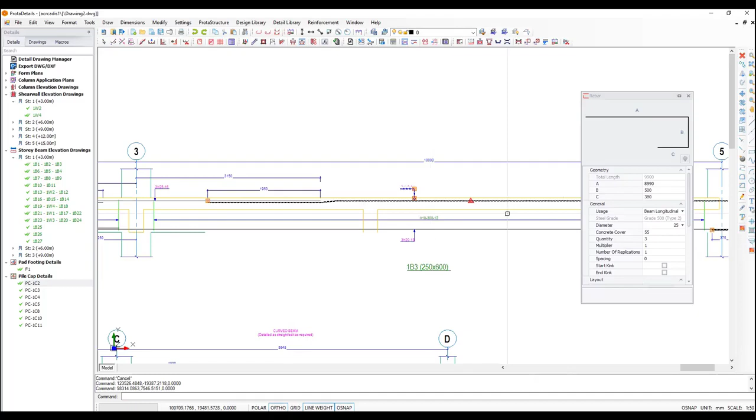We also understand that projects are not just about drawings. Owners want to know costs and contractors want to be able to fabricate. Here I'm selecting some details of interest and instantly creating the full quantity schedules, every bar broken down and quantified in one live schedule. And if there's changes, just make the change and the quantities dynamically adjust. We can update changes real time, keeping you and your client informed. For fabrication, bars can also be broken out and displayed in detail. Every element that goes into constructing your project can be drawn out.

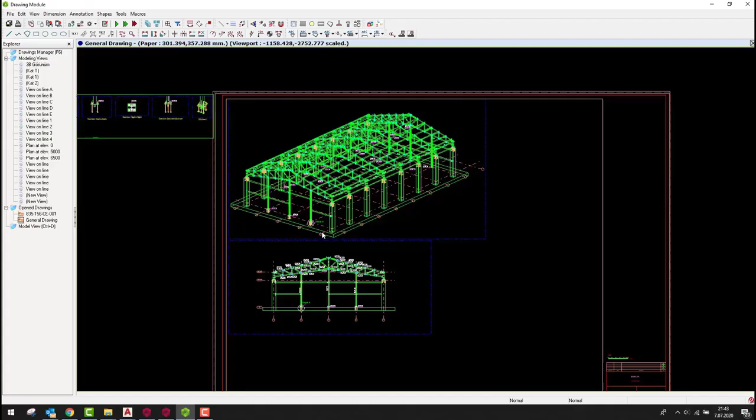This doesn't stop with concrete detailing. From our fully connected steel model, where we may have used IntelliConnect and our intelligent library of macros to design, we've introduced simple tools where you can isolate the connection elements you wish to detail out. Here I've selected a connection and chosen the perspectives I want to detail. I can create model elevation and plan views, and instantly provide all your detailing. These can all be further annotated to suit your detailing preferences.

Imagine being able to add significant value to a client because you can seamlessly go end to end, from modeling, analysis, design, into detailing, and directly into fabrication, providing all the information needed to construct a project. Because we have a fully connected steel model, we have not just designed our connections, but also considered how this is constructed.

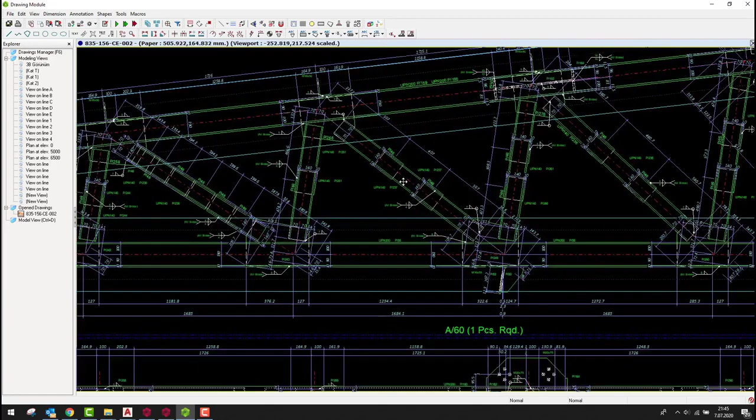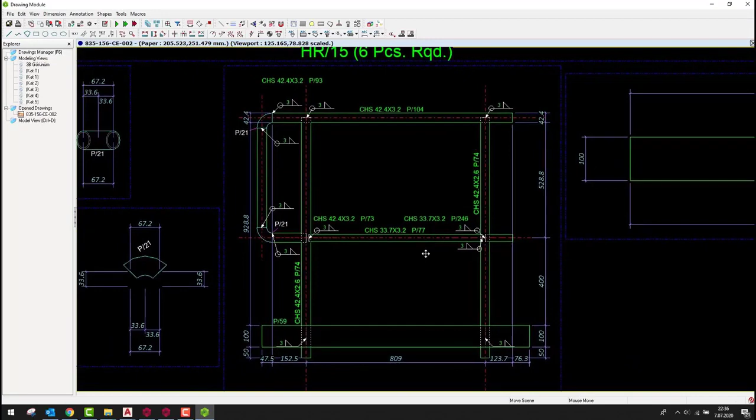ProtaStructure 2021 allows us to automatically create all the assembly and fabrication details from a single connected model. Here you can see a truss detail and how it fits together in this assembly drawing. Here are some staircase assemblies, and on this sheet I can see all the detailed components of these elements. What's more, every bolt, nut, stud, plate and section is fully broken down and quantified, all with precision and the detail needed to construct these elements, providing full assembly and fabrication information at your fingertips.

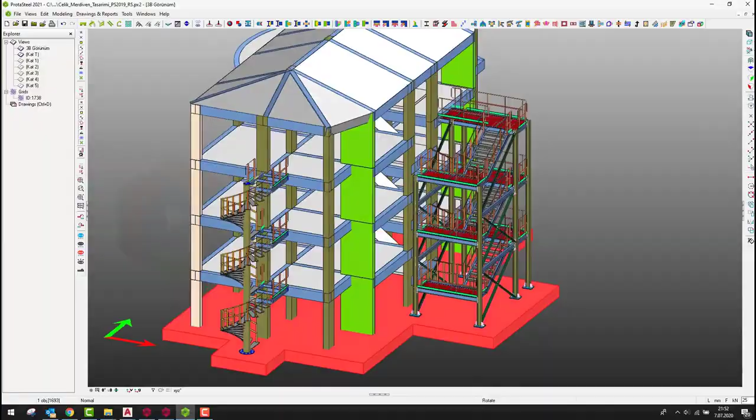This leads nicely into BIM, because we have all this physical information, even down to fabrication, and we may want to share this with others. Whether it's an owner, the lead architect or services engineers, we can take all the information ProtaStructure provides and share it with our project team. At Prota, our vision around BIM is to provide an open platform, allowing you to share and collaborate as much of your project information as possible. From our Prota Hub technology for working with IFCs and 3D DXFs, to Revit, to DWG, to even using different analysis engines, even to Excel, we've made ProtaStructure 2021 an open platform for communication of all the information you want to use.

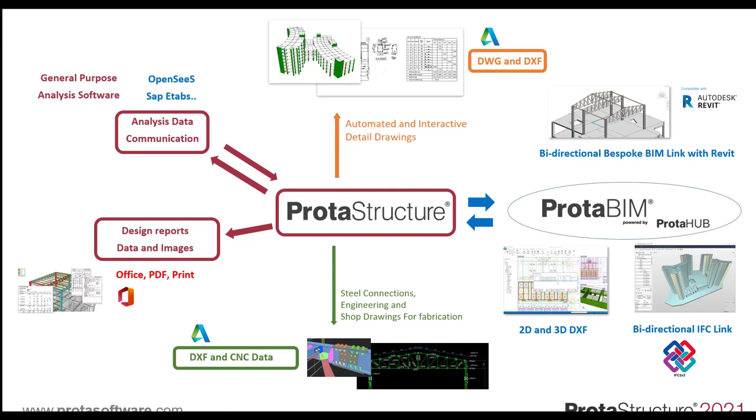Today we've talked at length about our new ProtaStructure 2021 and how structural BIM design technology is a game changer for engineers around the world to seamlessly deliver modeling, analysis, design, detailing, fabrication and BIM all in one package. But there's one more thing I want to share with you today.

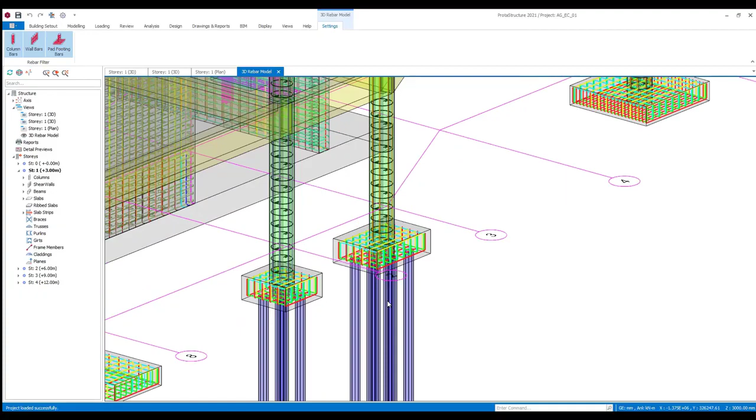ProtaStructure 2021 now introduces new 3D rebar modeling technology. So from any ProtaStructure model, you can see 3D rebar visualization for things like columns, walls, pile caps, pad bases. You can see this live in real time and visualize how the model will come together. Now this technology is not just for show. We are now using this to help drive our detailing capabilities.

Throughout ProtaStructure, you can see this in action with our new swimming pool design macro, where the reinforcement is designed in 3D and used to generate detailing, or with our pad base and pile caps, where the 3D reinforcement drives the drawings. This technology drives the way forward for us to deliver enhanced design and detailing. Imagine being able to design and fully detail a dome in 3D, or look at stairs or extremely unusual geometry. This is where at Prota we have a passion for harnessing technology and creating simple, elegant structural engineering solutions to help you deliver your projects and your ambitions all in one singular system.